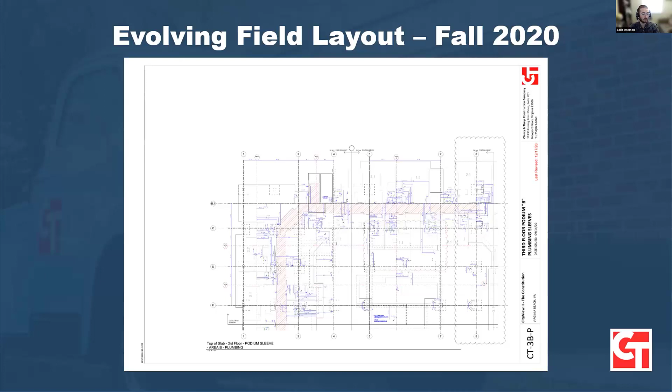So taking a closer look here, you can see on the left, we typically would establish control lines that are dimensionally tied back to column grid or some other known building coordinates. And then from that, the trades would use this dimension plan to locate each sleeve individually, and that would basically mean intersecting these two dimensions to place each sleeve. Very manual process, obviously a lot of room for error there, but also just a very time-consuming process.

So yeah, very tedious. You get to work and you're like, God, I'm gonna have to do that task today.

Exactly, and also just the sheer number of sleeves; this is a residential project, so it is very easy to potentially overlook a sleeve or pull the wrong dimension for the wrong sleeve. But the main driver really was the time factor. In order for this process to start, you have to get your concrete form deck up, and almost as soon as that happens, you typically have rebar installation starting as well.

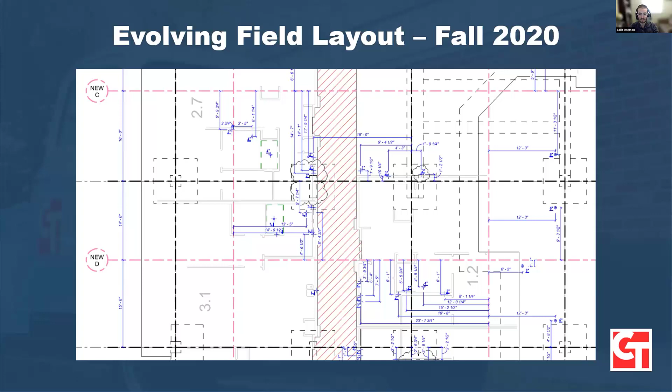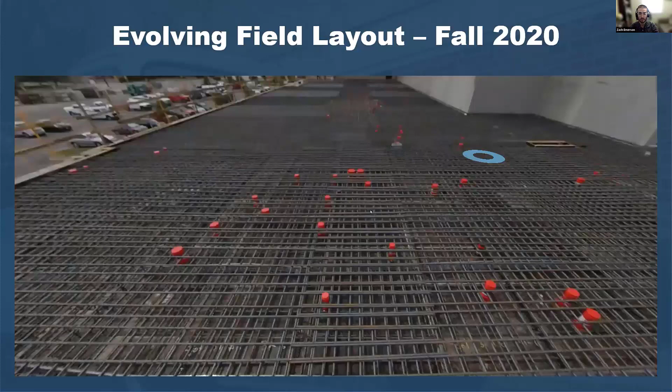The preferred approach is to get all of your sleeves in first, just because rebar can really take up a lot of space. And if you don't have your sleeves in the right location early enough, you've got to work around rebar that's already in place. It can just really get away from you. And that time factor is really what drove us to start using some of the digital layout tools.

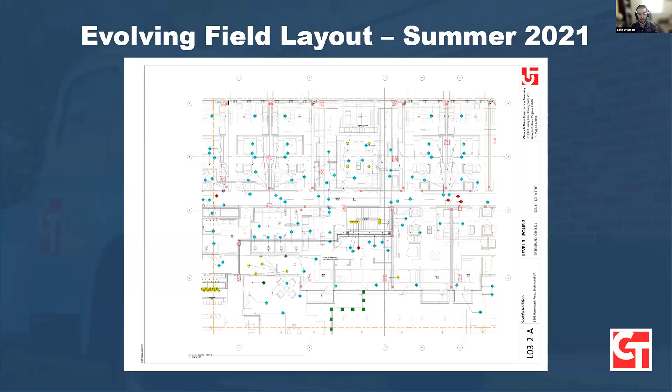So a few months later, summer 2021, we had our next major podium project, and our concrete contractor actually approached us and recommended that we try using some of the point layout tools. They used a robotic total station for all their formwork layout, and really recommended using it for sleeves and embeds and other concrete related or adjacent components.

Between the speed that concrete contractor works at, and also the fact that this was a post-tension podium project, so lots of very critical structural components embedded in the slab beyond just your standard steel reinforcement, it really required that we were able to lay out sleeves accurately and quickly enough as to not slow them down. So we partnered with them and started really adding this layout process to our coordination efforts.

Typically for coordination, we work closely with our mechanical, electrical, plumbing contractors to get their sleeve locations identified, whether it's just a typical unit plan for repeated unit layouts, or more specific needs for risers up through the building, things like that. It's a very involved process. We usually would sit down with them and go through one by one, and designate dimensions for each fixture type or each unit type to really get those sleeves located as accurately as possible.

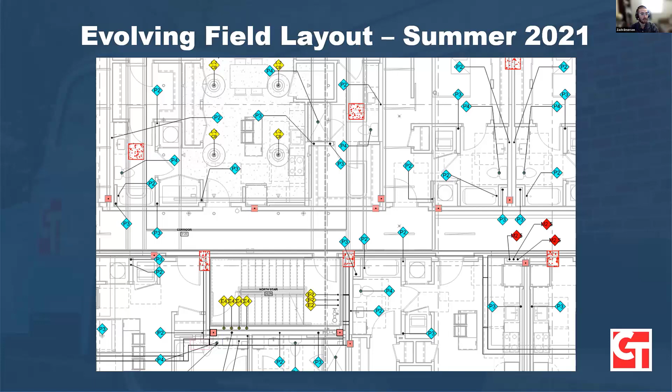Around the same time, and this is a reused picture, but you get the idea, we also started using the same point layout process, again integrated into our MEP coordination process. And then rather than working with the concrete trade, we actually sent the final point file layout to a third-party surveyor who performed all the layout for us. Again, similar costs to investing in a robotic total station.

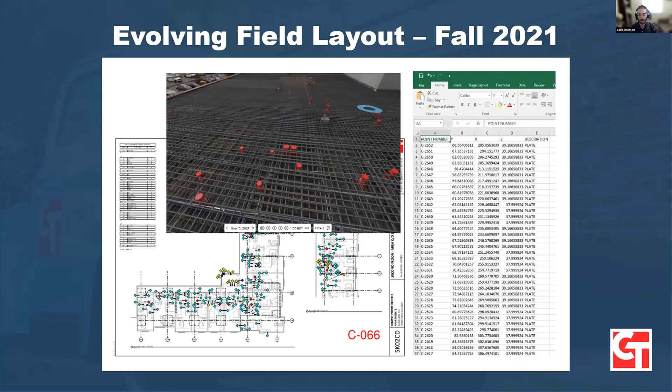So on our next major project at the end of 2021, we finally bit the bullet, so to speak, and bought our own robotic total station, Hilti PLT 300. One of the main reasons we selected it was it was recommended by a few of our trade partners for its user friendliness and ease of layout.

And just an overview, here's a time lapse of one of our superintendents performing layout. You essentially set up your robotic total station, sight it into known control points on site, and then the total station will follow around the prism on the top of this rod, and it essentially guides you from point to point.

And each time you lay out a point, it directs you to the next closest one, which really ensures that you never miss a sleeve, and obviously really speeds up that process and allows you to get all this layout completed well ahead of any mild steel reinforcement, or especially any post-tension tendons or other structural elements going in.

Another advantage. While you're at it, Brian, thank you so much for your question. What software are you using for your point creation? So I'll go over that in a little bit, but we've primarily been using the Autodesk point layout add-in for Revit, and we've had a lot of success with that. Awesome. Thank you so much. Sorry, I didn't mean to interrupt.

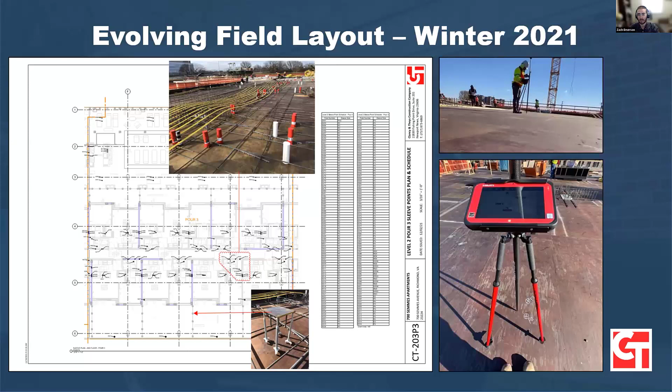So on this same project, we not only made some improvements and got a little more sophisticated in our workflows, but we also started seeing some of our subcontractors get a little more sophisticated as well, working from marked up PDFs rather than the hands-on sitting down with them that we were doing just a year before. In addition to that, we've also started receiving CAD files and some other easier to use processes.

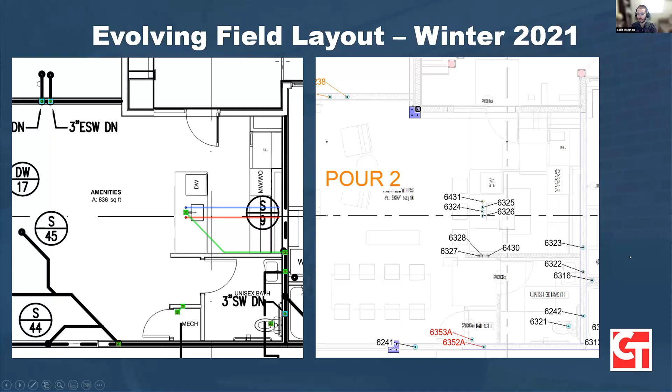So you can see here, we got a marked up PDF locating just a handful of common area sleeves. And then we worked to get those placed within the Revit model, and then worked through our coordination process, weekly meetings with the trades, to review and confirm those locations.

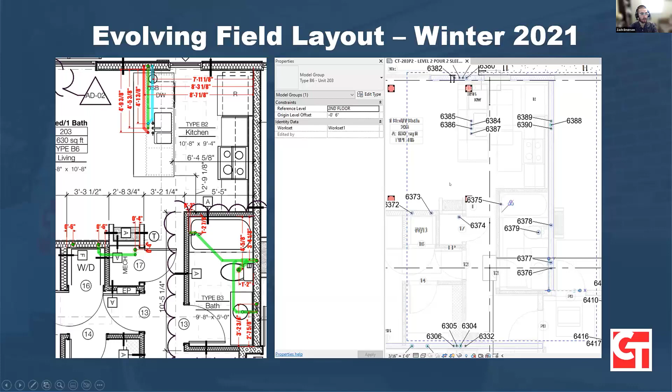And here's an example of a typical unit plan that we received that allowed us to actually create model groups for repeating units. Occasionally you might need to create a one-off for a different unit layout. And here are some more examples of the actual equipment involved.

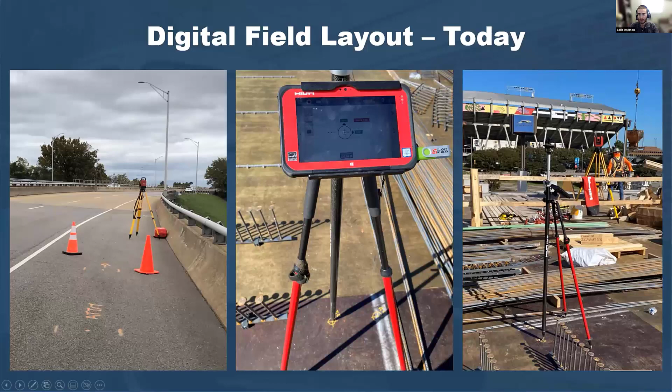So this is the total station set up on a remote location where you're able to sight into your known points. And then here's your prism and rod used to locate, mark and lay out your sleeve locations. Another example of just how important it is to get these sleeves in there and located correctly, and the amount of other elements in that slab that, once it's all placed, you don't really see.

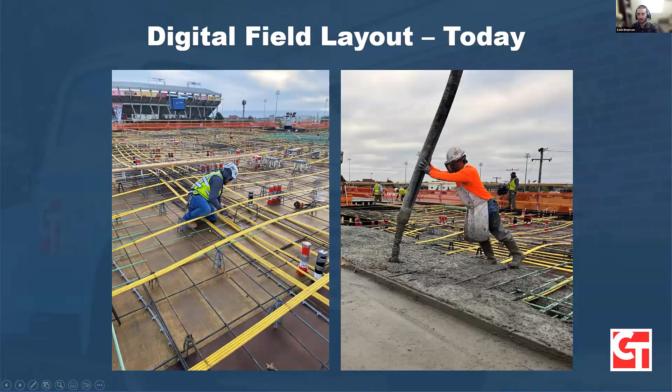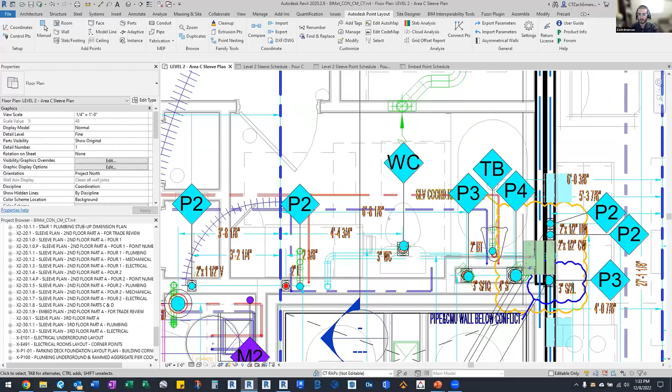From here, I'm gonna switch over to Revit just briefly. So this is an example of just one of our concrete pour areas. We've done most of our coordination already. Let me see if I can. Okay, so this is the Autodesk Point Layout add-in. Kind of the easiest process here is you can do an instance and choose a sleeve point. It actually automatically picks the next sequential number for you.

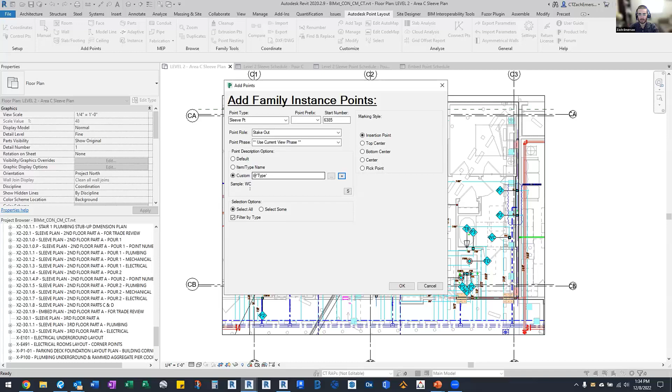And then you can select a type so that it puts the description of exactly what that sleeve is automatically. Select all your different sleeve types, or you can select them individually, just depending on how you want to number them. And then it generates a series of points. You can create a schedule from it. This is one I had set up in advance. And I will jump back over to my presentation.

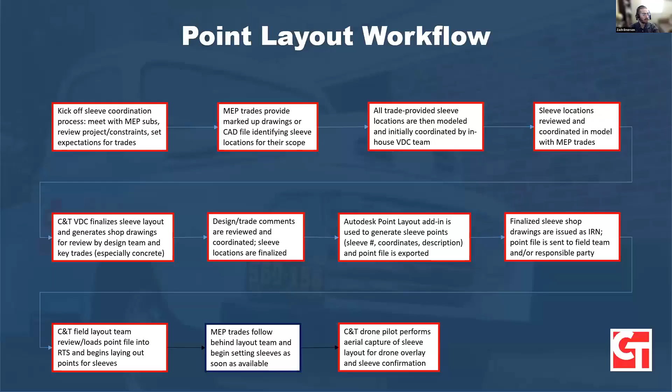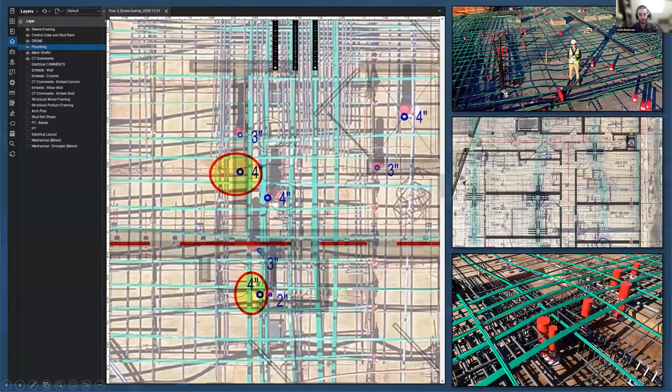So this is just a couple examples of that drone overlay that we do to really do some quality control, confirm our sleeve locations after the fact, prior to the pour. This is a great example that one of my coworkers in the Raleigh office put together that really shows how much information you can build into this review process. All of this is in a self-contained PDF that can be sent around for review. Between the point layout and then being able to follow up and do some quality control with this, it really makes the process easy. Just a couple of additional examples of that.

Are those a compilation of photos that are put together from the drone, or is it like one giant photo? Do you know? So we kind of have taken both approaches. Some are an orthomosaic where it's a composite of multiple images, but sometimes you'll get a little bit of skew with that. So it's better if you can do just one complete overall image.

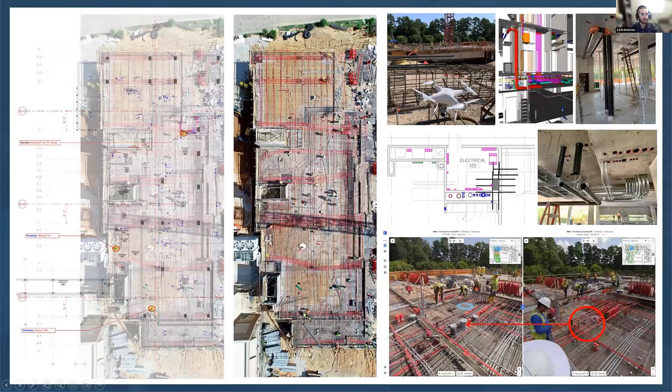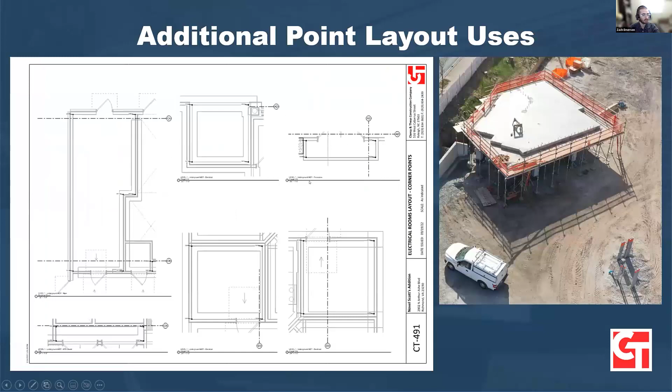There are a couple other additional layout uses that I was going to go over, but looks like I'm a little short on time. Let's see here. No, I think you have a few more minutes there.

Okay. One other use case for this that we're not using in my office, but again, wanted to highlight: our main office in Raleigh actually has a full-time surveyor in-house. I'm not sure that they're doing much advanced layout for the sleeve layouts; I think most of their trades handle it themselves. So he will actually come around with more or less the same process and back check any structural embed locations, sleeve locations. And then from that, he's able to generate a deviation report, showing where we have certain embeds or sleeves in or out of tolerance.

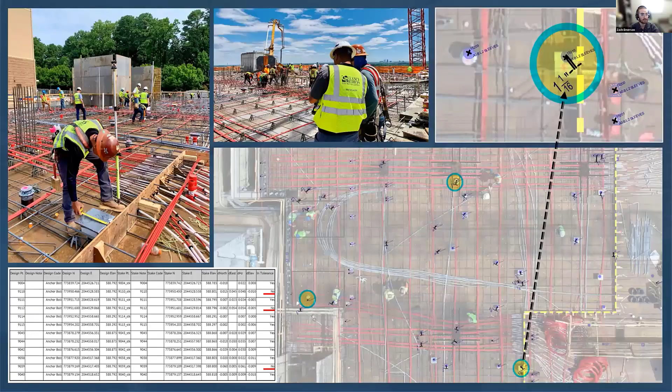And overall, we've really just had great success with this whole process. And I would say it's well worth the investment, at least for us. Well, it seems like many people agree. We're getting quite a few comments in terms of people having used this software and never going back, as you're mentioning. So for those of you who are on the fence, I would say that this is definitely the way to go. Make no hesitation. Everybody who is using it is absolutely loving it and wouldn't have it any other way. Absolutely, the way to go.